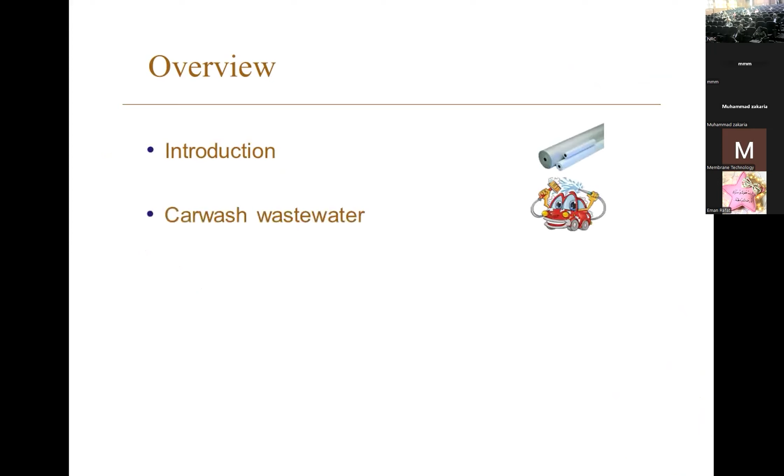Yes, thank you for the kind introduction, Professor Mava. I selected an interesting topic. I decided to talk about challenging wastewater, specifically car wash and oily wastewaters. A quick outline of my talk: a quick introduction, then we run into the topics car wash wastewater and oily wastewater, and certainly we round the whole thing up with some conclusion and outlook.

The background for this talk is the sustainability development goal number 6, clean water and sanitation. Safe water, sanitation, and hygiene are essential for our human health, and billions of people are lacking these services by the year 2030, if they're not lacking already now.

The water demand is rising due to increasing population, urbanization, and increased needs for agriculture, industry, and energy. Half of the world's population will face severe water scarcity at least one month a year in the future. And to make things even worse, we have climate change, which might worsen the whole situation.

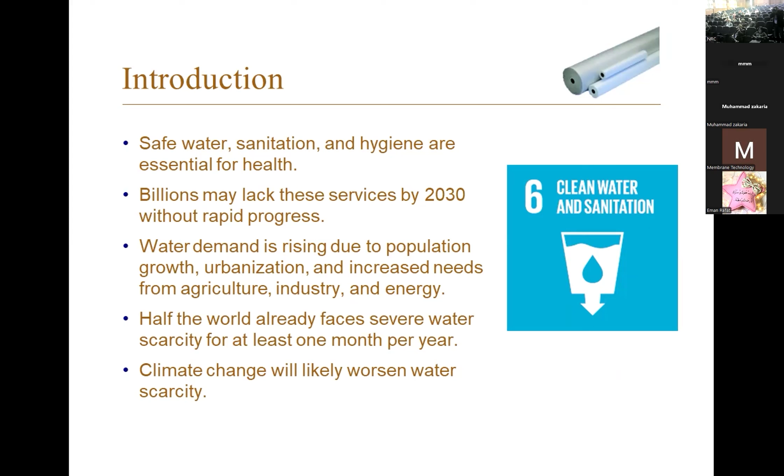So we really need to find ways to improve water quality, but also recycle water in a good way. I'd like to talk about two examples. One is car wash wastewater. It's surprising - the total amount of water used for car washes worldwide is about 420 million cubic meters per year. Automatic car washes account for 55 to 60% of car washes, but 40 to 45% are done manually.

That's important to have in mind, because an automatic car wash needs about 100 to 300 liters per wash. For manual wash, it can go up to 500 liters. The good thing is that automatic car washes already recycle quite a bit of the water - they achieve something like 70 to 80%.

But for manual car washes, you need some sort of simplified system, which can be on a trailer, so that people doing manual car washes can drive around, help people with manual car washes, and recycle the wastewater. That was the idea we had when we looked at car wash wastewater.

We had a company in Sweden. They wanted to offer a service going to people, to their cars, washing the cars, and recycling the water they use for car washing in an effective way.

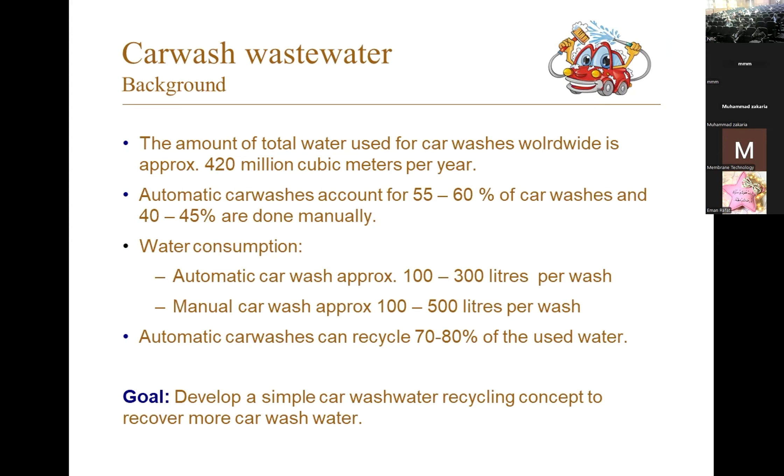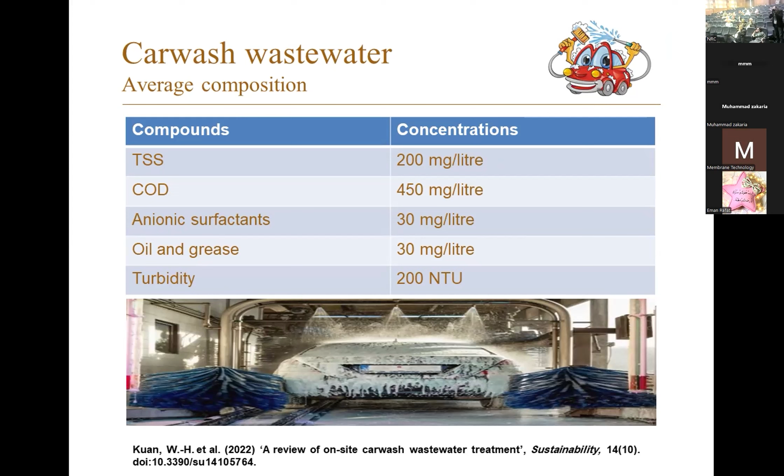When you look at car wash wastewater, the total suspended solids are about 200 milligrams per liter, COD is 450 milligrams per liter. Because you use washing aids, you have anionic surfactants. Cars don't come without oil and grease, so you have both in the wastewater, and based on this, the wastewater will have a certain turbidity.

The concept we came up with was: wastewater tank, paper filter, ozonation, nanofiltration, and clean water. You can see nicely in the picture what we achieved with the different processes - this was the original wastewater we collected.

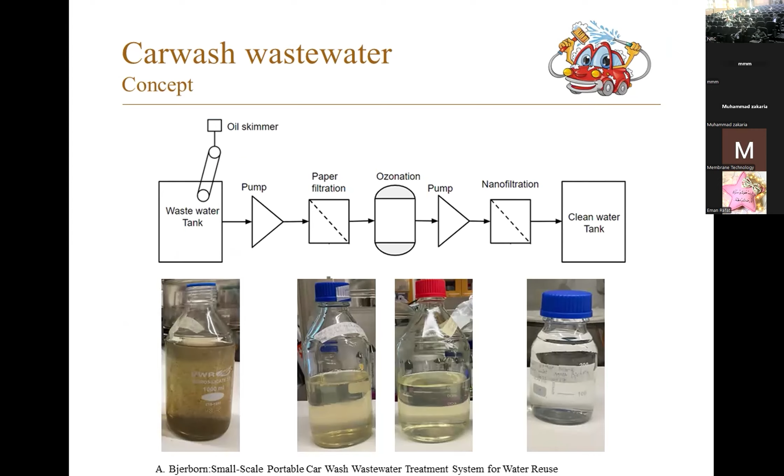After the paper filter, you can see it's already improved. After ozonation, it's getting even further, and finally the final water after nanofiltration - you can see it's clear water, which you can hopefully assume with me could actually be recycled and used for another car wash.

Putting some numbers behind it, we tested different nanofiltration membranes. For total solids and turbidity, the process was working very, very well. Conductivity, we were not so successful - it depends a little on the process. COD was also removed, depending on the membrane, very nicely.

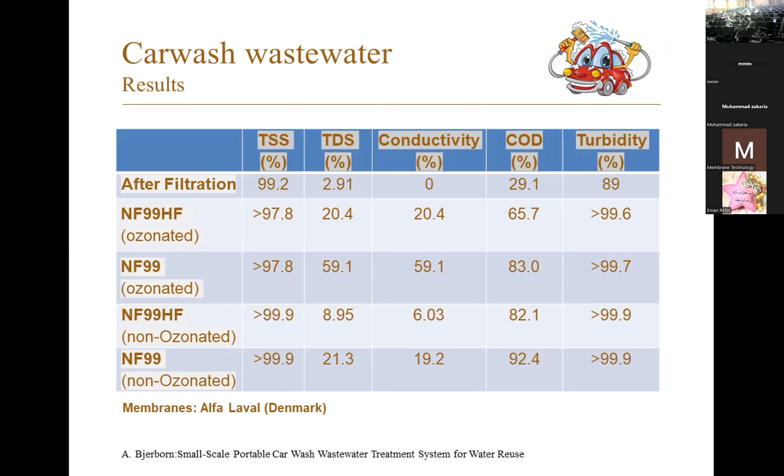When we looked at membrane fluxes, that was certainly important, because our unit should be as compact as possible. Independent of which membrane we used, or whether it was ozonated or non-ozonated car wash wastewater, we achieved very nice high fluxes - in the range of 150 to 250 liters per square meter per hour. That was quite nice, very much on the upper range, and we hope to achieve similar fluxes when we go to larger scale.

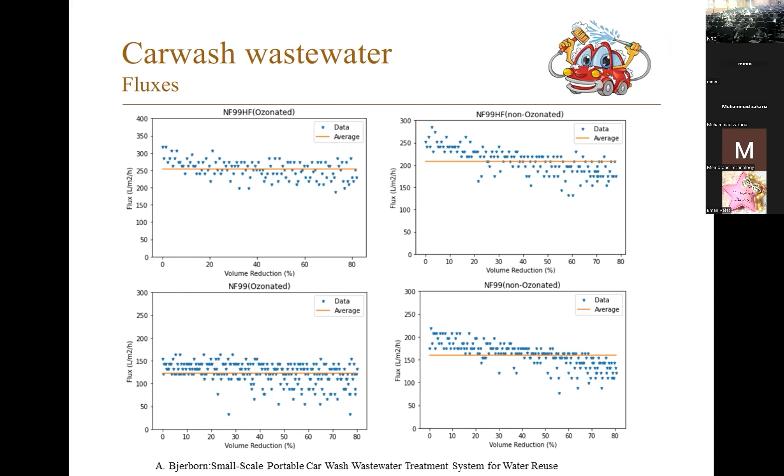When it comes to the carwash wastewater case, we could see that total solids, COD, and turbidity can be reduced significantly, allowing us to reuse this wastewater for another car wash, therefore reducing the total amount of water used for car washes.

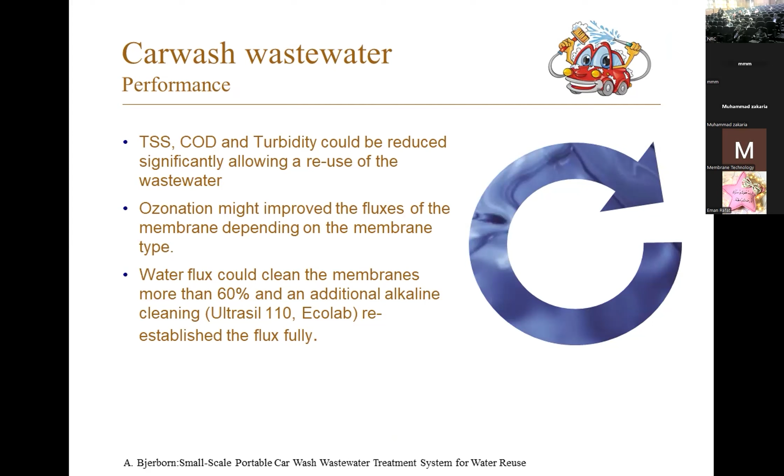Ozonation might improve the fluxes of the membrane depending on the membrane type, and water flux could be cleaned and re-established by more than 60% using alkaline cleaning with Ultrasil 110. That was also very nice.

Now I'm coming to another case study, oily wastewaters. Oily wastewaters are found in a great wide variety of industries. You find them as produced waters in the oil and gas industry, as bilge water in the marine industry, or for example as process water in the petrochemical industry.

When you look at the global produced water production alone, you're talking about 8.4 billion cubic meters per year, so that's a lot of water. The main drivers are tightening regulation requirements for discharging processed water and the growth of industry. A simple process like ultrafiltration with polymeric membranes offers an energy efficient and compact approach for industry to reduce oil in water down to less than 1 ppm.

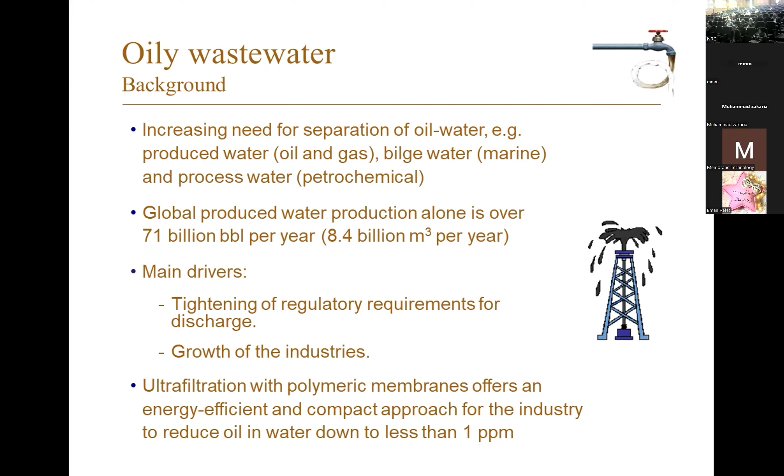That sounds good, let's look a little closer. There are different other technologies available: skimmers based on gravity density, coalescers based on coalescence, centrifugal separators again based on centrifugation density, and microfiltration using a sieving mechanism, but microfiltration is more open than ultrafiltration. So when we use ultrafiltration with the sieving mechanism, we have the highest efficiency, and that's actually quite good.

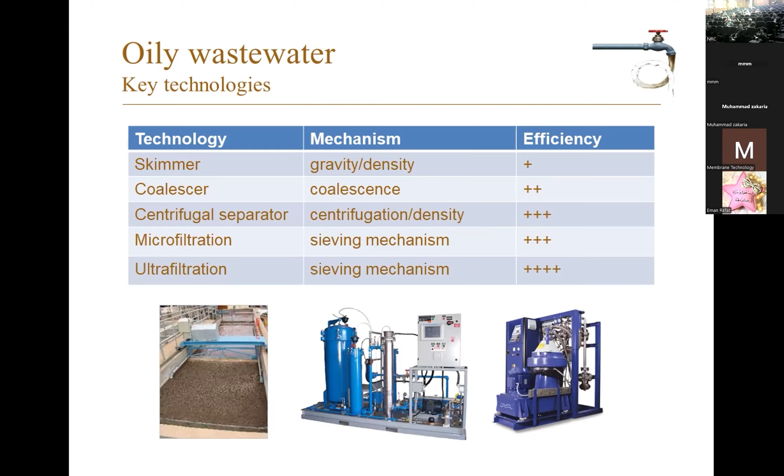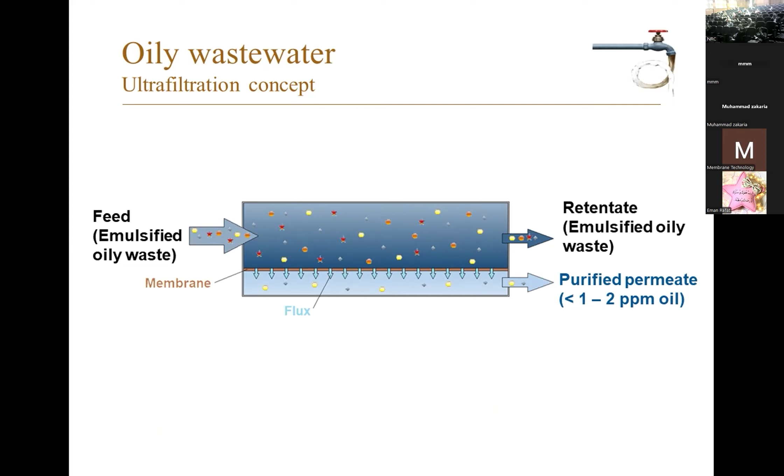When it comes to oil removal, we would like to have a process with high efficiency, and that's basically the process we look at. We have a feed of oily emulsified oil waste, and the retentate is then the concentrated oily waste. On the permeate side, we get 1 to 2 ppm oil in the permeate, so very low oil concentration when we use ultrafiltration.

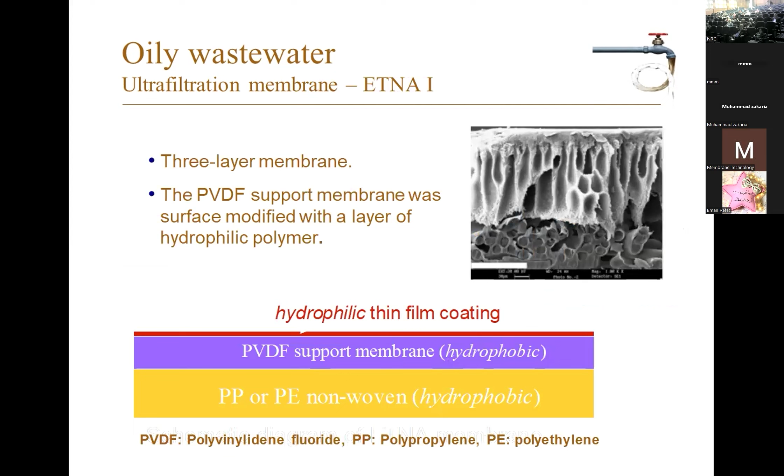The membrane we used was a 3-layer membrane. It's a PVDF membrane on a polypropylene or polyethylene support. This membrane has a very hydrophilic coating, a cellulose coating, which gives it a very hydrophilic feature. This is the Etna membrane we used.

The membrane is a commercial membrane by Alfa Laval, and it shows consistent performance over cleaning cycles and life cycles. The membrane is quite unique, and you can actually recognize it quite easily.

It's actually a brown membrane, and the story is that when they developed the membrane, the R&D director was on vacation in Sicily. When he came back, they showed him the membrane, and he looked at it and said, 'Oh yeah, the color reminds me of Mount Etna in Sicily.' So that's the reason why the membrane has this surprising name, the Etna membrane.

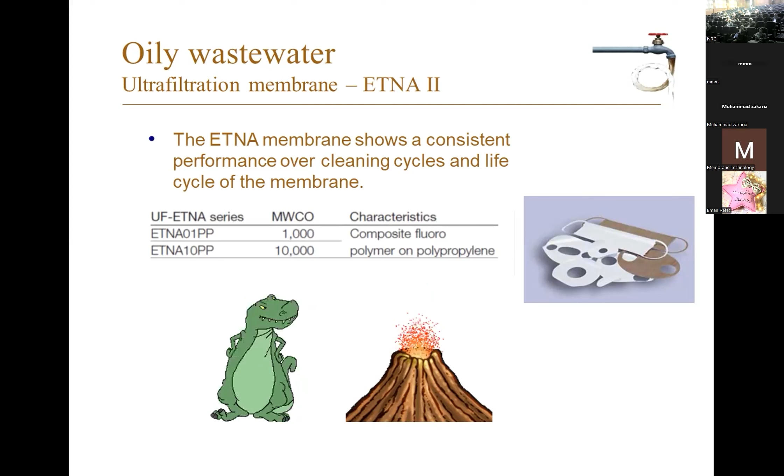When I made the slide, I put this volcano there, and when I showed it to my son, he was very happy about it but said, 'Where's the volcano? There had to be a dinosaur.' So therefore it's a dancing dinosaur on the slide. It has nothing to do with the membrane, it's just there for happiness.

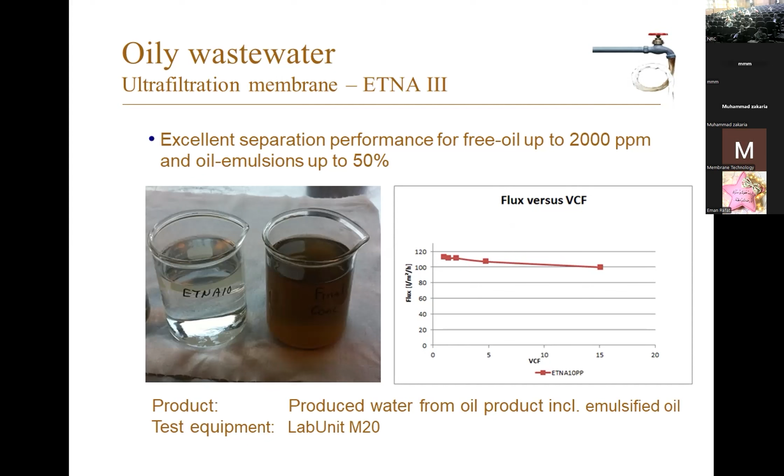I would like to look at two case studies I was involved in during my time at Alfa Laval. One was the treatment of bilge water and oily wastewater from an industry with low suspended solid concentration. The capacity of this case was actually 40,000 tons per year, and it was a batch concentration in an automatic plant.

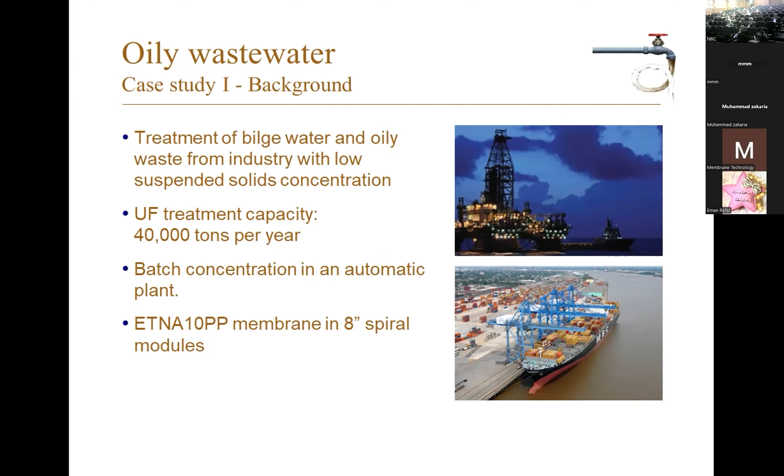They used the ETNA10PP membrane with 10 kilodalton molecular weight cutoff in an 8-inch spiral. That was actually the concept.

Simple as this: basically they had a big tank which they heated up. So in the tank they had a phase separation, an oil phase and a water-oil phase. The oil phase went directly to the separator.

And then the oil-water phase went through a paper band filter and then the ETNA membrane, and out you get very nice water, which was directly discharged to the Baltic Sea.

There was an oil monitor, but they never had any problems with it. So that was perfect. The concentrate from the ETNA membrane was recycled into the tank ahead of the phase separation, and everything was in a nice loop.

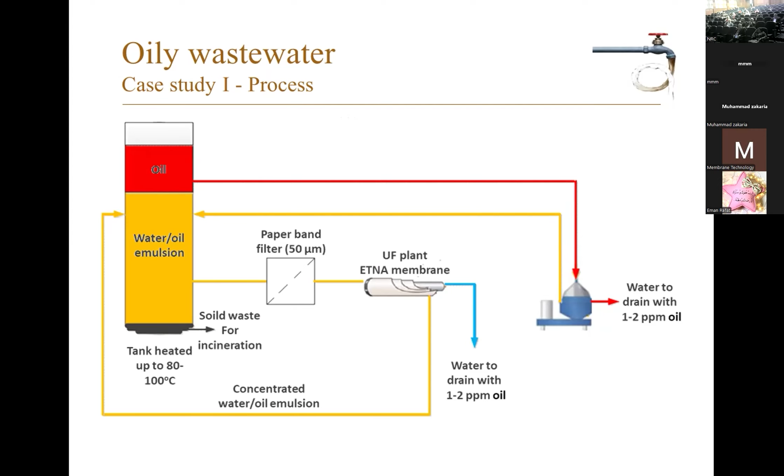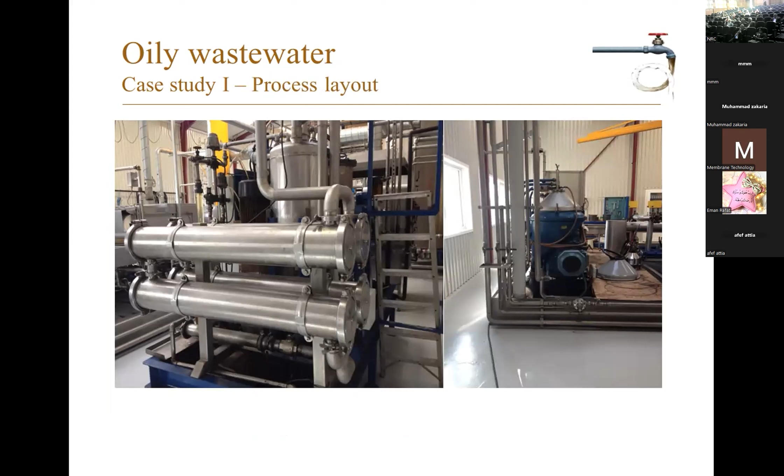This is how the membrane looked like, and this is the membrane section on the plant. And this is the oil separator, which was also installed in the plant.

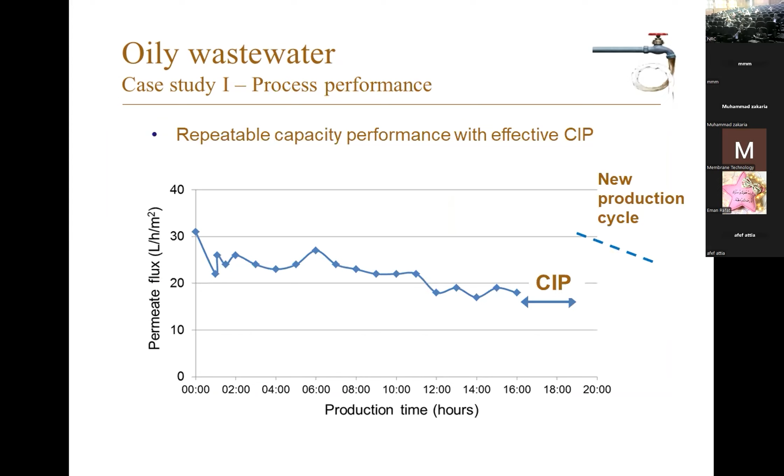When you look at the production, we got nice constant fluxes over quite a long time. After a couple of hours, approximately 16 hours, we did a CIP, and then we could recover the flux and do a new production cycle.

There was a CIP done once per day. The oil content was really 1 to 2 ppm in the discharge, and the plant has been in continuous operation now for more than 5 years. The energy consumption is about 6 kilowatt hours electricity per cubic meter permeate.

Then I would like to look at a little bit more complex case. This is a second case study looking at processing and treating oily waste from ships, petrochemical industry, and offshore facilities at high levels of suspended solids.

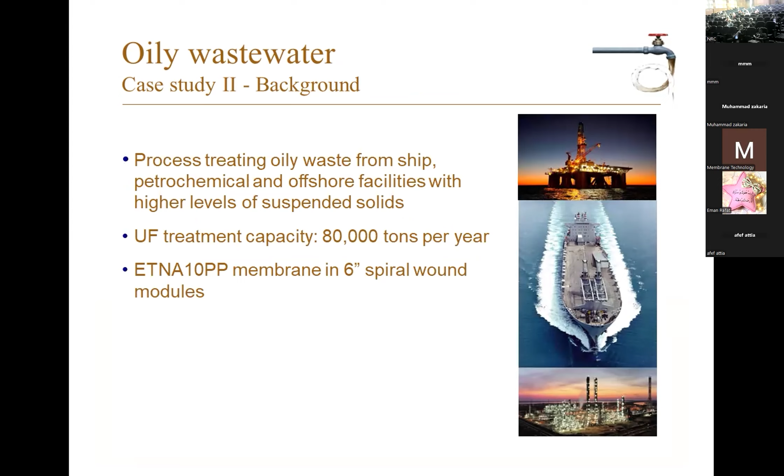The capacity is basically double, 80,000 tons per year. And we have the ETNA10PP membrane again, in this case in a 6-inch spiral module.

The concept starts similarly. We have the tank where we put in the oily wastewater, we have phase separation, but this time, because it's heavier wastewater, we use decanters to treat the oil phase, and then finally separators for the final polishing.

So this decanter cascade with separator was for the oil phase, and then we would take some of the light phase to evaporators as a final further polishing step.

But what they found out was that, although evaporator condensate is normally considered to be very pure and nice, in this case the evaporator condensate still had 200 to 300 ppm of oil inside. So they had to do something about the evaporator condensate before they could discharge it.

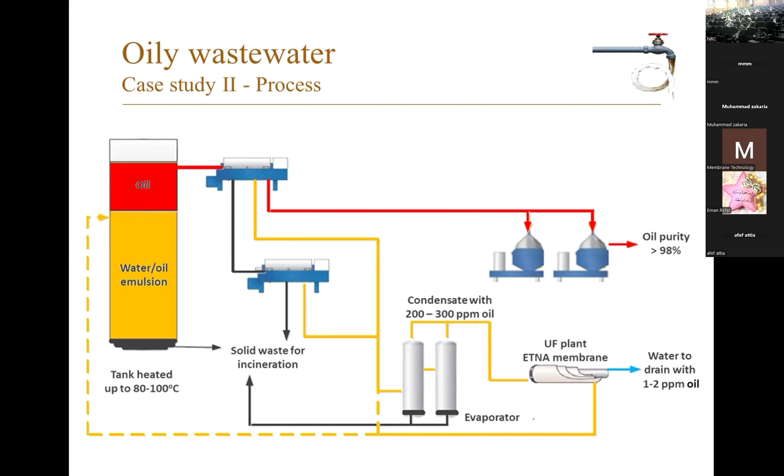So they installed a membrane unit, using the membrane in a spiral configuration, and out they got a nice pure water stream, and a concentrate stream which they could recirculate either into the tank at the beginning of the process, or in front of the evaporation step. This is how the plant looks like.

It's very much similar to before. But in this case, you can see here we have the housing of the spiral modules and some of the pumps in the unit.

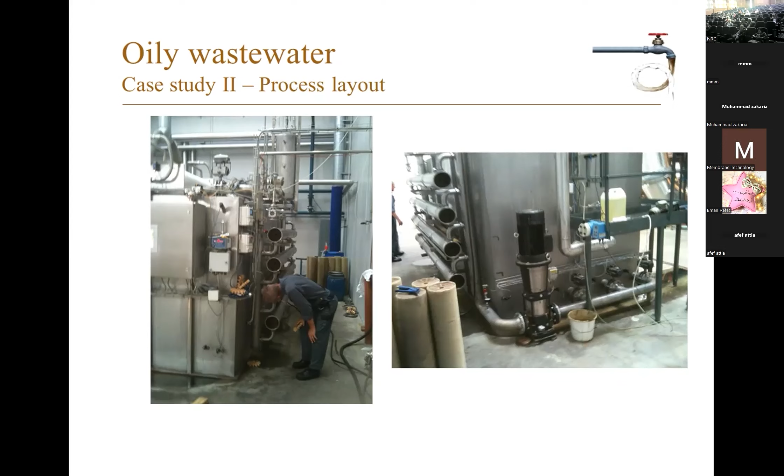This unit is also running very nicely. What is achieved is the oil content is reduced to less than 1 to 2 ppm in the discharge. The CIP, because even though after evaporation it contains oil, it's not good enough for discharge, it's relatively pure water.

So only every 5 days does there have to be a cleaning of the plant. And the plant is now in operation for more than 3 years, and the energy consumption is 4 kilowatt hours per cubic meter permeate.

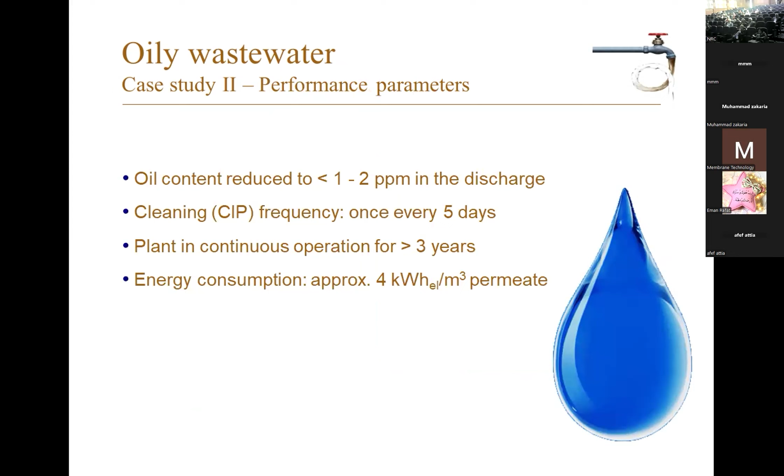So let's finish and round up a little bit. What I wanted to show you is that carwash wastewater can be polished by a simple process cascade, including nanofiltration for recycling, so that you can really reduce carwash water consumption. Oily wastewater can be polished with ultrafiltration to reach oil levels less than 1 to 2 ppm in the permeate. And I wanted to highlight with two case studies that membranes really can handle difficult wastewaters.

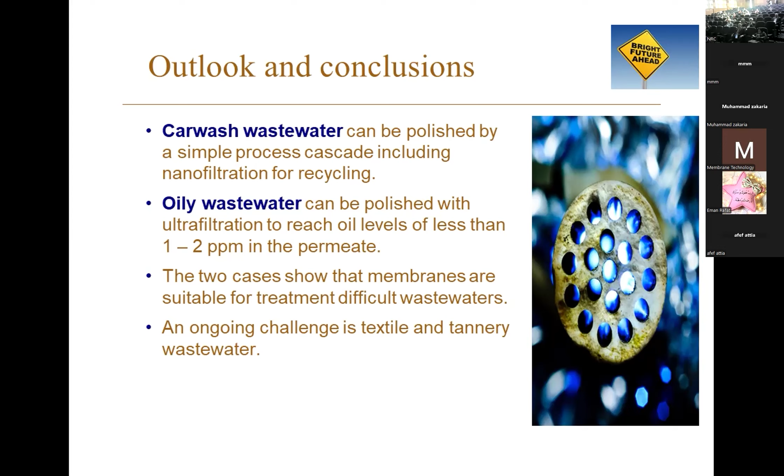And certainly there are ongoing challenges. For example, textile wastewater and tannery wastewater are still challenges. With our joint project between India and Sweden, we want to look especially at textile wastewaters, which I think are still a major challenge. Thank you for your attention.